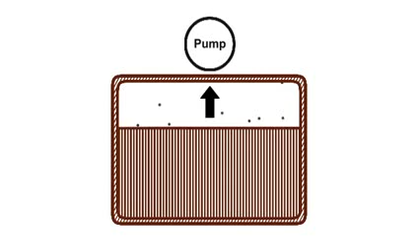The second rule of physics we need to buy into is this: the boiling point of a fluid is a function of pressure. You already knew it was a function of temperature, but it's also a function of pressure. Low pressure induces boiling—you may think of low pressure as pulling apart the denser liquid molecules and changing their state to a gas. High pressure induces condensation—again, think of high pressure compressing the dispersed gas molecules into a denser liquid. All this boiling and condensing can be accomplished by pressurizing and depressurizing the coolant.

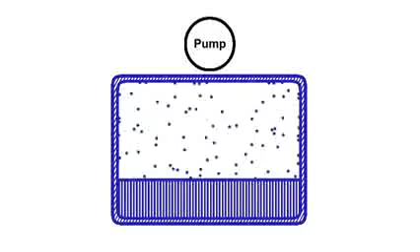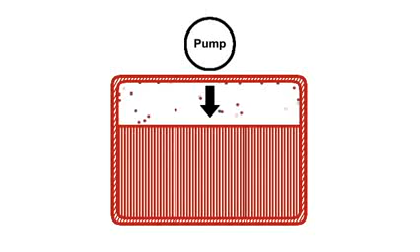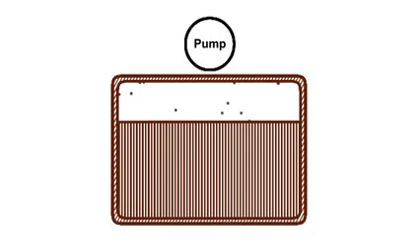This is important because it means that if we put coolant in a loop, boiling can be induced by reducing the coolant's pressure in the evaporator, and this makes the evaporator cold. Condensation can be induced by simply increasing the coolant's pressure in the condenser, making it warm. And so it goes, round and round—low pressure to high pressure and back, evaporation to condensation and back.

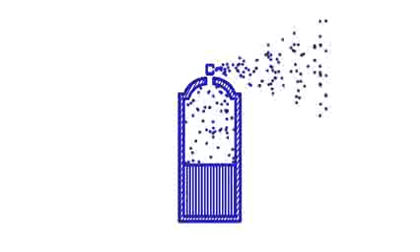You directly experience something like mechanical cooling when operating an aerosol can that, when sprayed, has cooled in your hands. What's happening is this: by releasing the nozzle, you release some of the pressure inside the can. We already found that with decreasing pressure comes boiling—the fluid is turning to gas. Boiling requires heat in order to change the liquid into a gas, and your hand feels colder because that can sucks the heat away from your hand to facilitate a state change inside the can itself. The can feels cold.

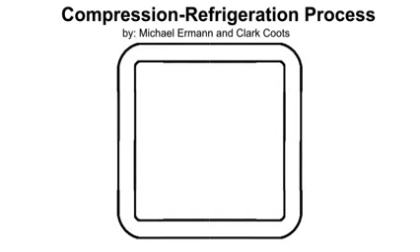The compression refrigeration process—let's diagram the compression refrigeration loop, air conditioning. We'll start with a closed looped tube and fill it with coolant. Coolant, or refrigerant, is a fluid that in this case has a boiling point somewhere near room temperature. A fluid may be a liquid or a gas, and here it will be a bit of both. Now let's insert a pump into our closed loop of coolant and begin circulating the coolant around.

At the other side of our diagram, opposite the pump, we'll insert a valve. Think of a faucet that's almost closed, letting just a bit of fluid through but keeping most of it back, building up pressure on the upstream side of the valve.

Very quickly, we'll see that we have most of the fluid on one side of the loop, a high-pressure side downstream of the pump and upstream of the valve. The other, low-pressure side, downstream of the valve and upstream of the pump, has less fluid because the pump is busy trying to move the fluid around faster than the valve is letting it through.

Here we draw from our aerosol can example. On the high-pressure side, we are pushing, squeezing the gas molecules, forcing them into a liquid state. And on the low-pressure side, we are ripping the molecules out of their liquid state and into a gaseous state. We are condensing on the high-pressure side and evaporating or boiling on the low-pressure side.

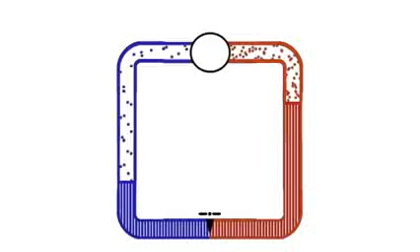Now let's position the cold side on the inside of our building and the warm side on the outside of our building, and add 2 fans, one per side, to bring air over each pipe.

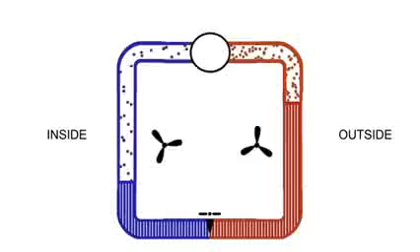We might then draw in room air at room temperature, say 70 degrees Fahrenheit, run it over a cold pipe, and supply it back to the room at 50 degrees.

Likewise, on the outside hot loop, the one with the condensing coolant, we will utilize a fan to draw 80-degree outside air across the hot pipe and deposit it back to the outside air at 90 degrees.

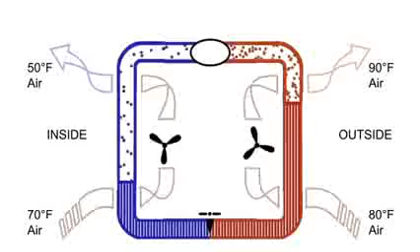We now ensure that the 2 air streams don't come into contact with one another. We'll put a little wall between them, and you'll recognize that we've diagrammed a window air conditioning unit.

In technical parlance, this type of equipment is also called a unitary system or a direct expansion system, and direct expansion is sometimes abbreviated to simply a DX system.

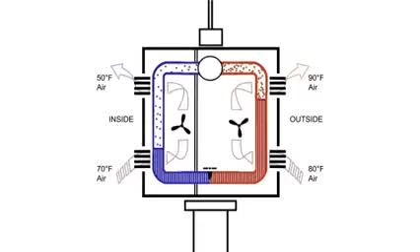This is a window unit, the simplest manifestation of air conditioning we see in buildings. But even the more complex versions of this system, the ones we'll see in forthcoming diagram animations, will essentially entail the same process, only heat will move around in a more efficient way, or will be used to service more than just one room, or both.

Compression refrigeration components.

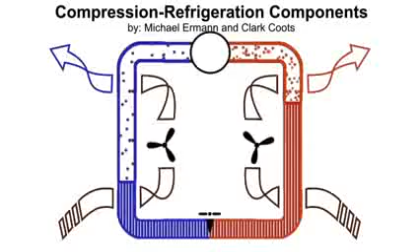Picking up where we left off with our compression refrigeration loop, remember we have a condensing side under high pressure, where gaseous coolant transitions to liquid coolant. It's the hot side, and opposite it we have an evaporating side, under low pressure, where liquid coolant transitions back to gas. It's the cold side.

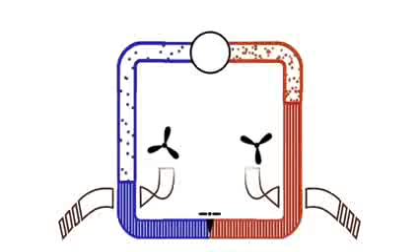Each side has air blowing across the pipe. Importantly, it's not the coolant itself that comes into direct contact with the air, but rather it is the pipe that carries the coolant that exchanges heat with the air.

Now, since the air blows across the pipe for the purpose of moving heat, efficiency dictates that we would prefer to maximize the surface area of each pipe to facilitate heat exchange. We will draw it like this, as a squiggle, and refer to each heat exchange squiggle as a coil, though it may, in practice, look more like a series of metal fins.

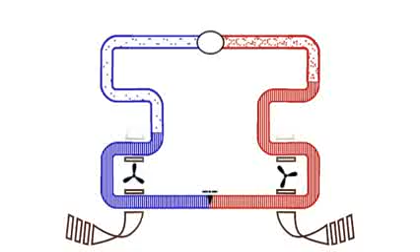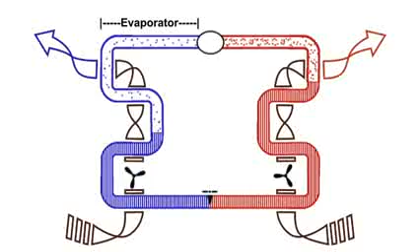The part of the loop where evaporation takes place, the cold side, is termed the evaporator, and the portion of the loop where the gaseous fluid condenses is termed the condenser. What we were calling the pump that moves the fluid around is actually termed the compressor, and the valve that lets only a bit of fluid through at a time is called the expansion valve.